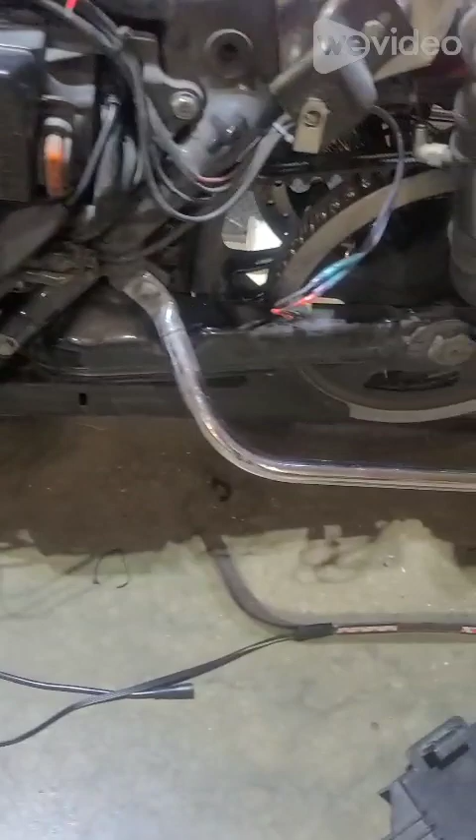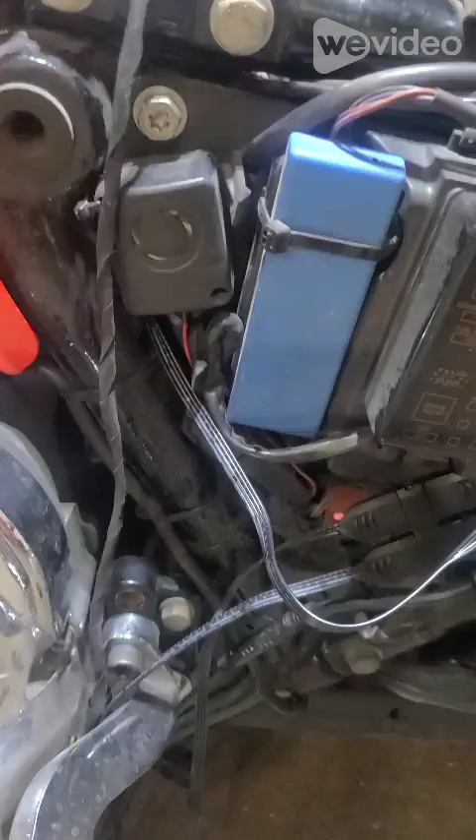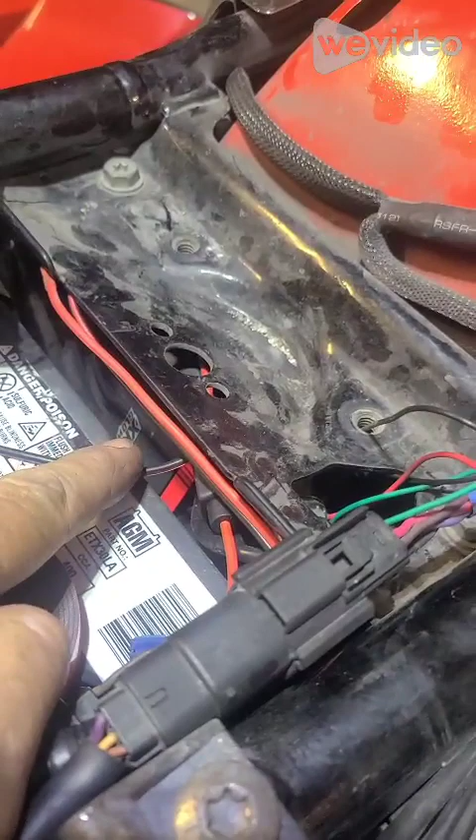These are down here, there's going to be a pod back here in my fender. The strip here is going to run up and come into the connector here that you see. This is the splitter, and it comes from my control, which is put back here underneath the seat.

It's got 3 wires that come out, a black, red, and a yellow. I added wires, so I've got a black, red, and a green, and these are for left, right, and brake signals, so you can turn your lights, whatever.

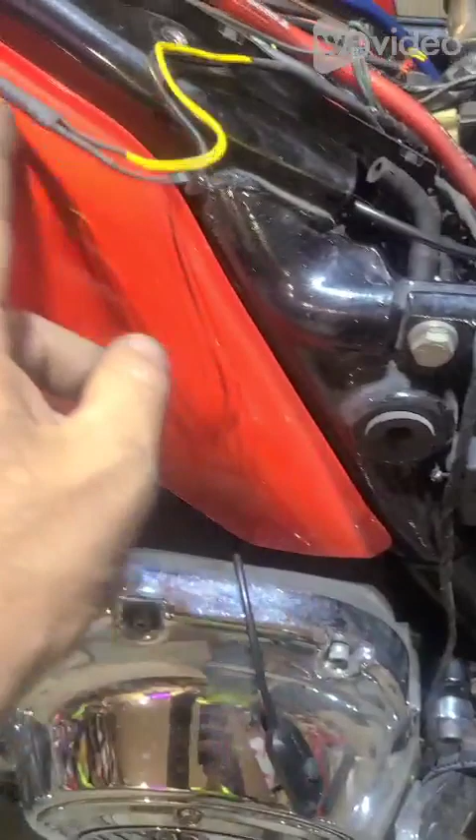Then from this pod here, from the splitter, I go up and come up in here. I'll have a pod in here, just like the other side where it's at already. It is, let's see, where's it at? Right there, you can see it.

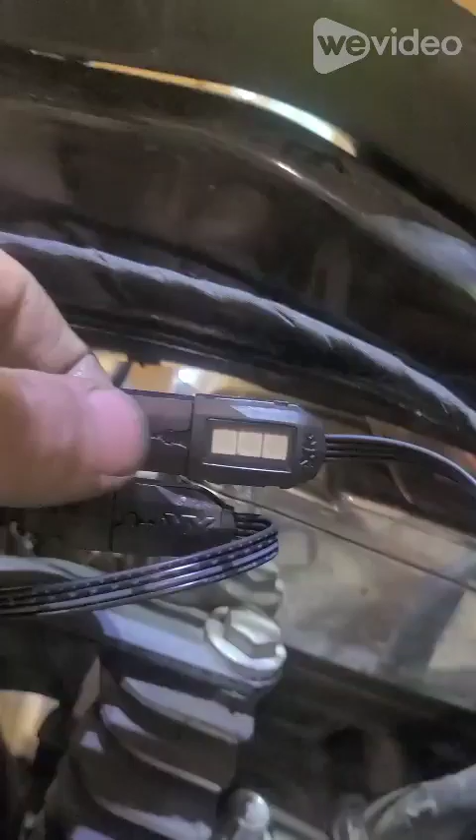It'll be over here, and then it's going to run up, and there's going to be a strip that goes across here, which you can see. I already have a strip and a pod right here by my splitter, and then my splitter is going to come off to my horn right here after I get it put in here.

Sorry, after I get it put in the horn. And then it's going to run off of that from here up into my fender up here, and I'm going to put a pod on the inside of my fender in here on each side. There's separate channels, so there'll be 1 channel per side.

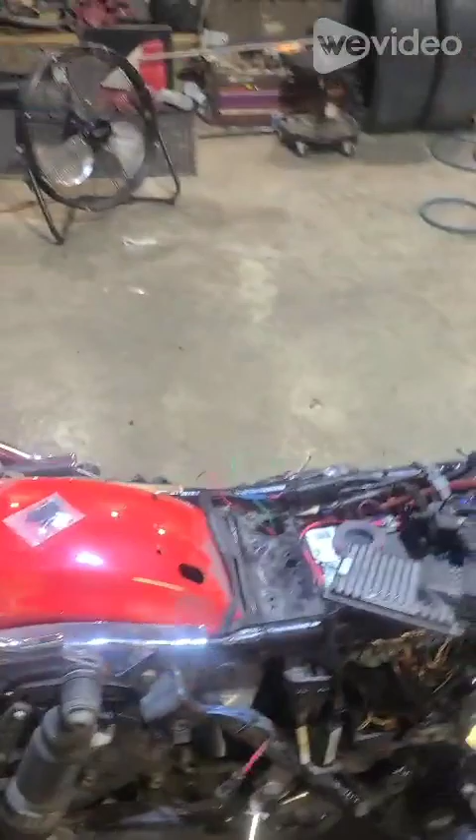And I've already got some of the lights on, let's show this again real quick. This is XKglow. I've got, with this kit, 10 pods, 8 light strips. And you have to pretty much lay it out however you want, because there's no videos out there other than this one that's going now.

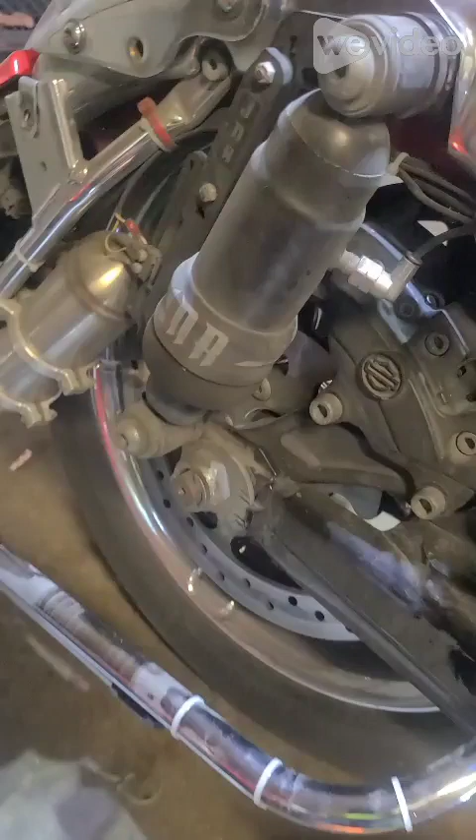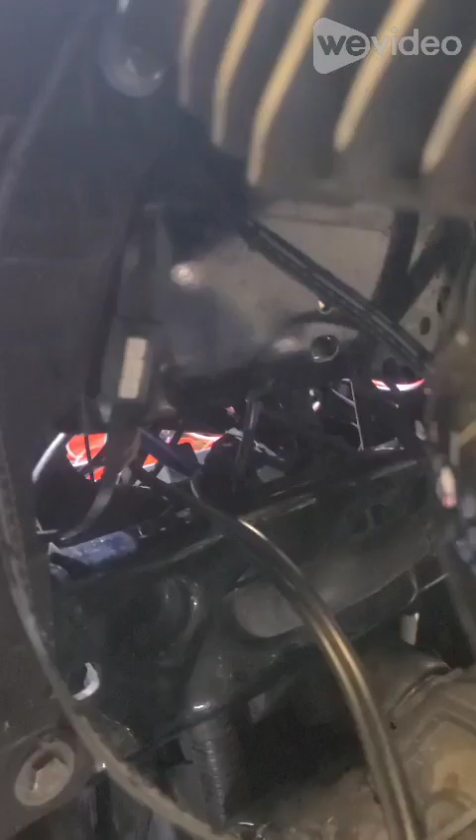But there, I put a pod there. I put a strip here underneath my bag that runs across the bar. Like I said, I put a pod in there, and I am working on putting the pod here. It would be on top of this valve cover, and then the strip's going to cover the rest of the area here.

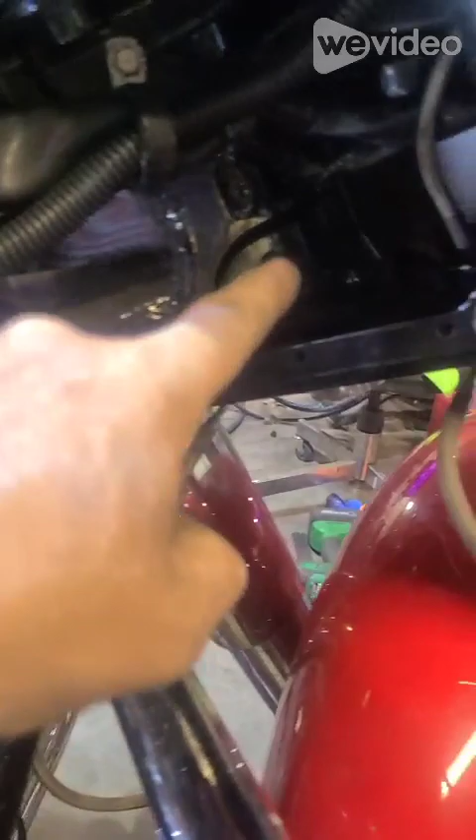Then I'm going to split off of it and go up into my neck and down my brake into the inner fender. So far it doesn't look bad.

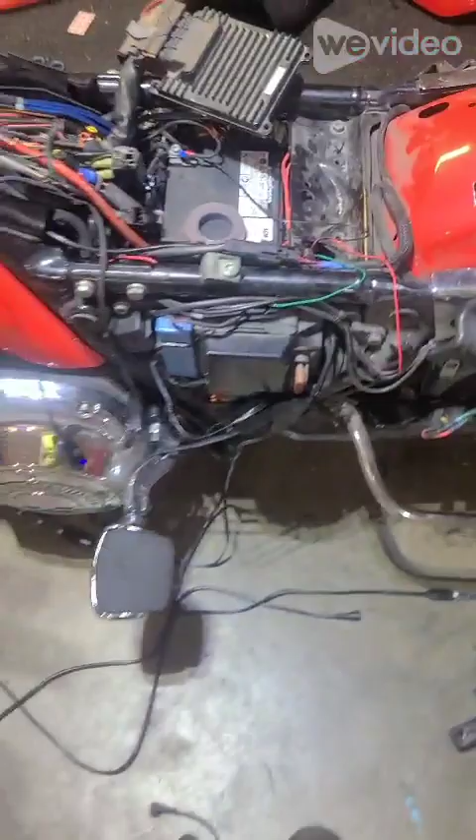You gotta, when you get them, take them out, hook them all up, make sure they work, and if they don't work, you can exchange it. But I've done that with mine. I mean, these are my lights just laying around right now. But as you can see...

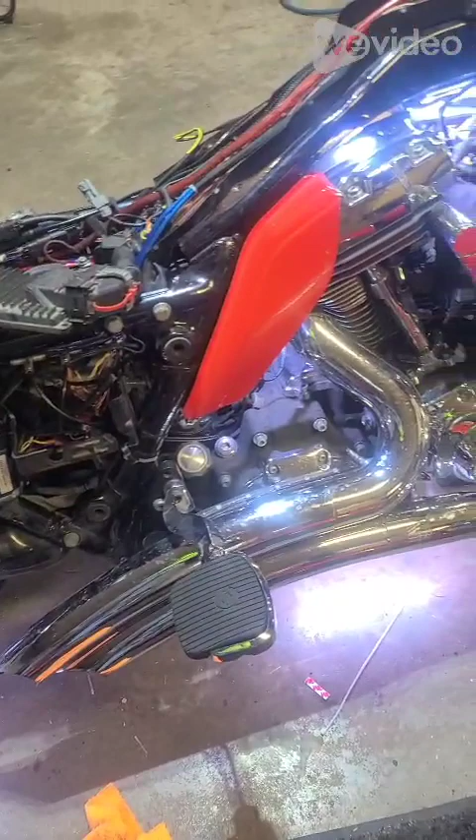Standard turn on is white, and it has all these other mods or things in the app that you can do with colors and the way it rotates and runs down and just different stuff. So I wanted to give you a quick rundown.

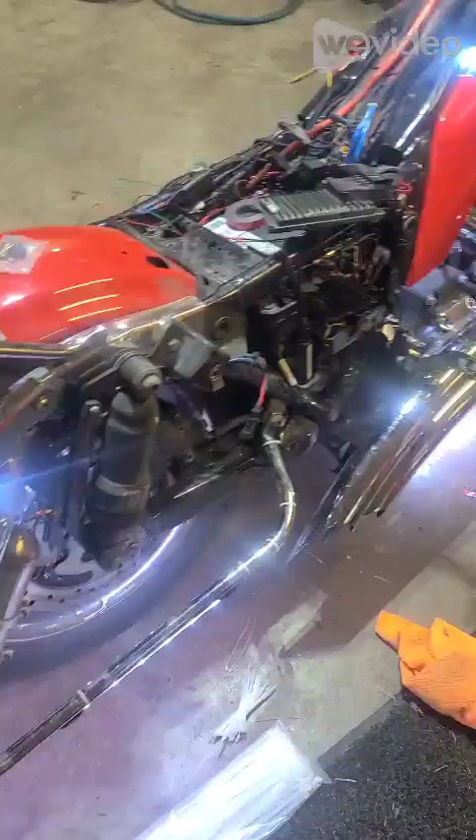You gotta clean all the spots good, 2 or 3 times with alcohol. Make sure they're clean so that the sticky sticks to it. It's got extra stickies, I've got all the extra 3M stickies that I could want, and little ones for the zip tie holders right here.

I got more, I got 8 splitters, Y splitters. I got these zip ties that they supply. That is definitely not enough, you will need to get more.

We've got two RGB splitters, this is a main, and I got two main cords also, which I forgot about and I'm not gonna run. This one I just got hooked up, but we're not gonna run it because there's no need for it right now. There's not enough on my bike to do that. Once I get it done, I'll figure out how to add it to this video, and you can see it when it's completed.

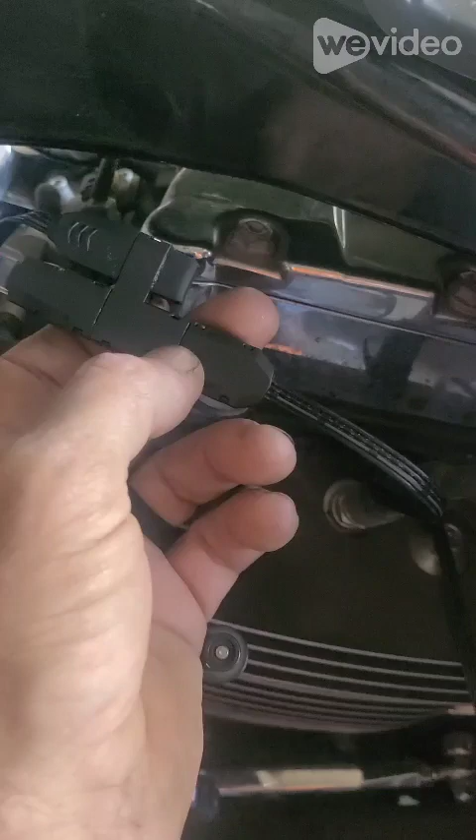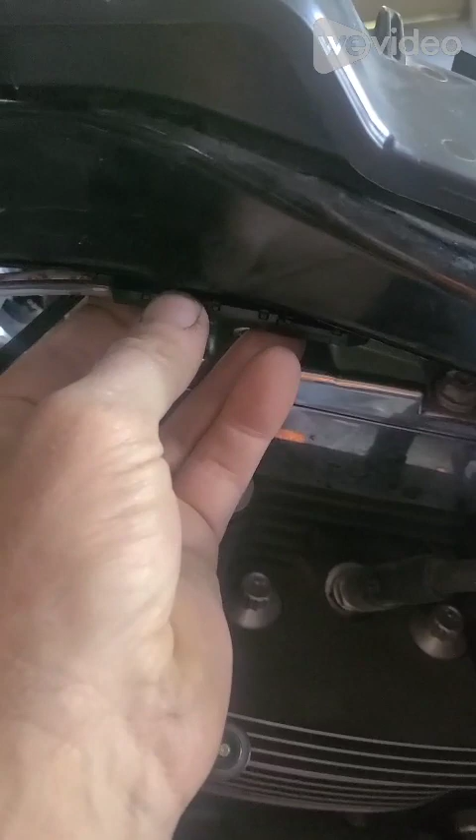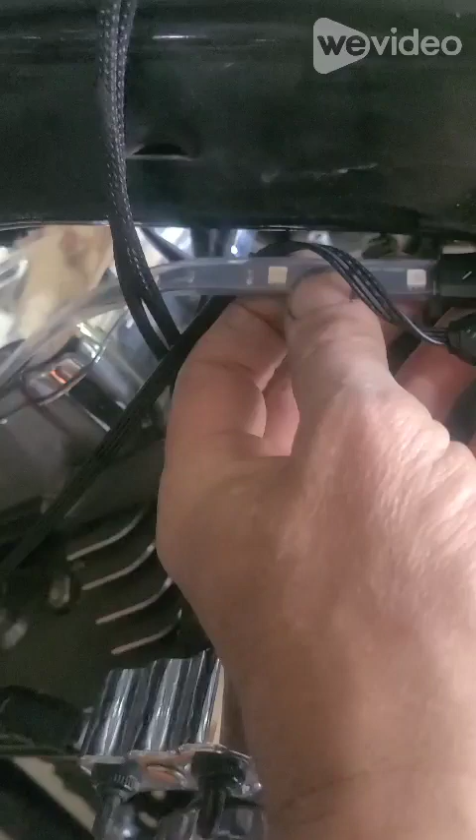Okay, I want to cut in here real quick and show you. While I was running everything, I noticed that these Ys are all one way. I was going to go here on my neck and run them down just like I did the other side. Well, with me doing that, this piece here is running right in with my spark plug wire. On the other side, this piece is on the outside, more or less like this. But if I did it that way, the lights would be pointing up, and you can't do it that way. You only connect one way.

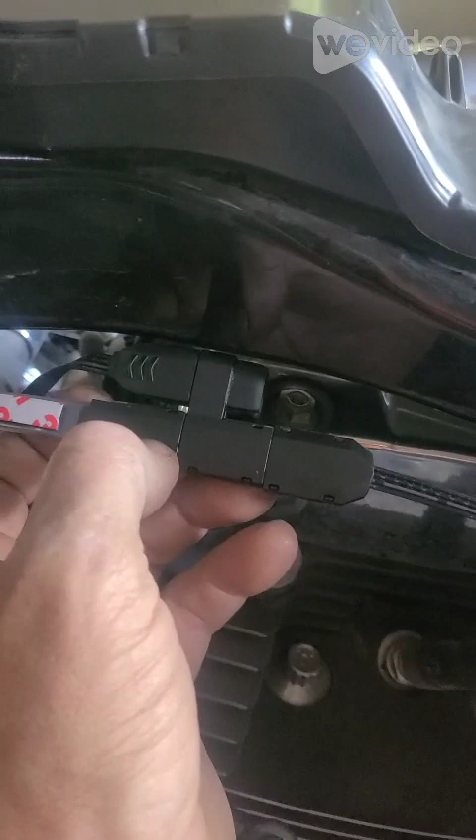I wish they'd make a left and a right, because that would be helpful, but this is what we got. I'm going to continue to finish so that I can get this video done and get it out.

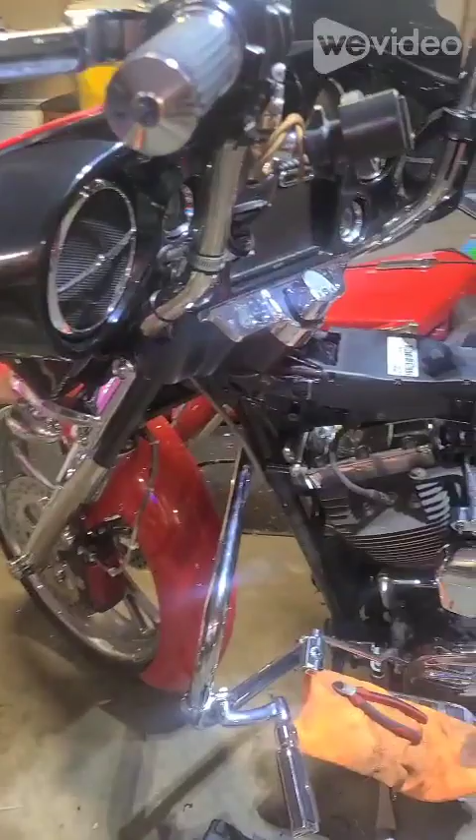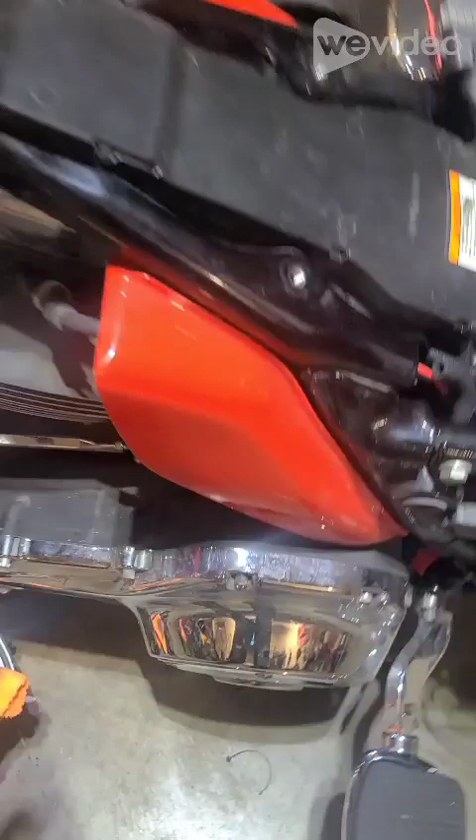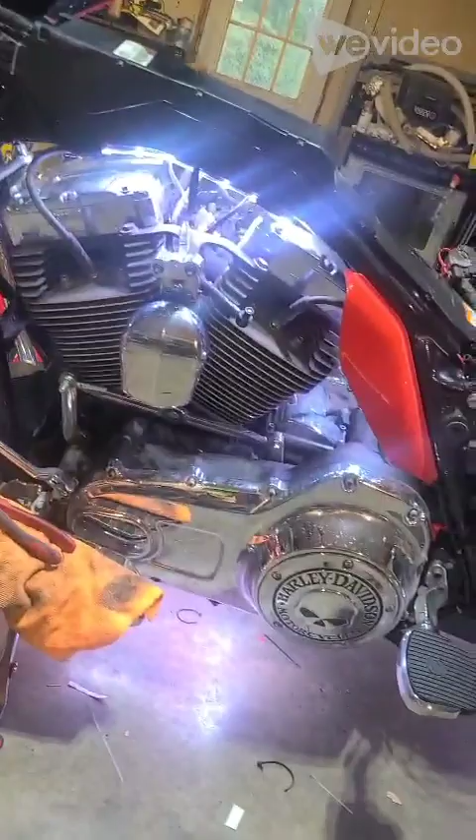Okay, so I want to go over this real quick with everybody and show you I have ran everything that I have. Let me turn them on. My power button is behind my wind plate here, or whatever you want to call it. But I have them ran under the neck, both sides of the neck. I have a set under the bike each side. I've got two pods up here, one on each side.

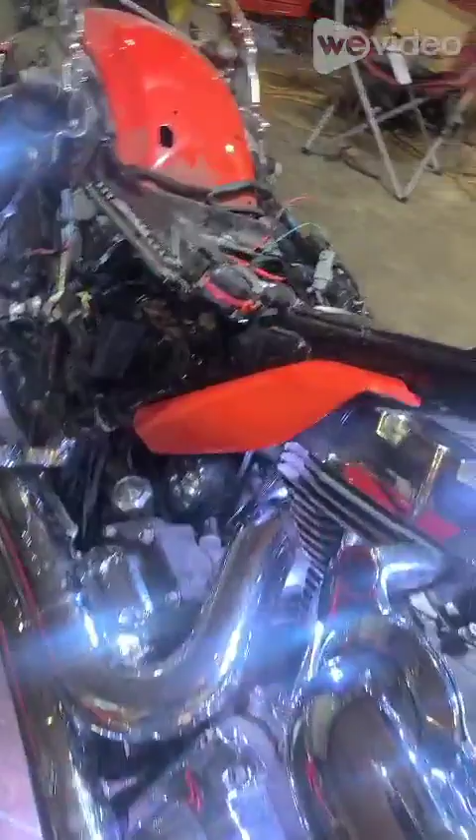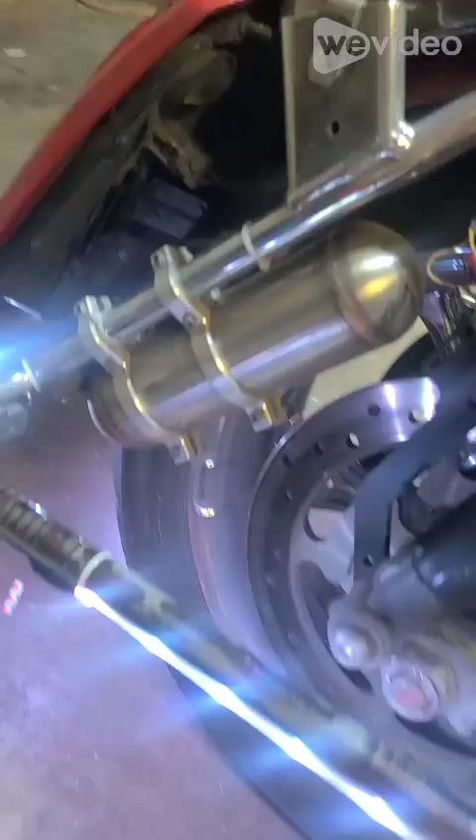I have the sides done. There's strips on each side here on your bag. And then I have the pods in here underneath on my fenders, on the fender. And this is how I had it all laid out.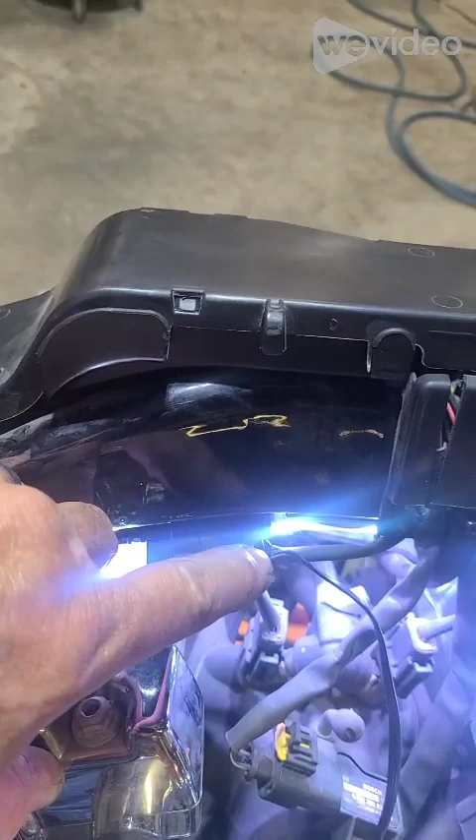Like I said in part of the other video, these little things here, the splitters, the Y splitters, are a little cumbersome in the way they're built. They're built the same way on each side. So this part is hitting in, like I said, my spark plug, but it sticks over here to get the same effect. Then I ran it up my neck, up in there, and come down, chasing it around with my brake cable or brake line.

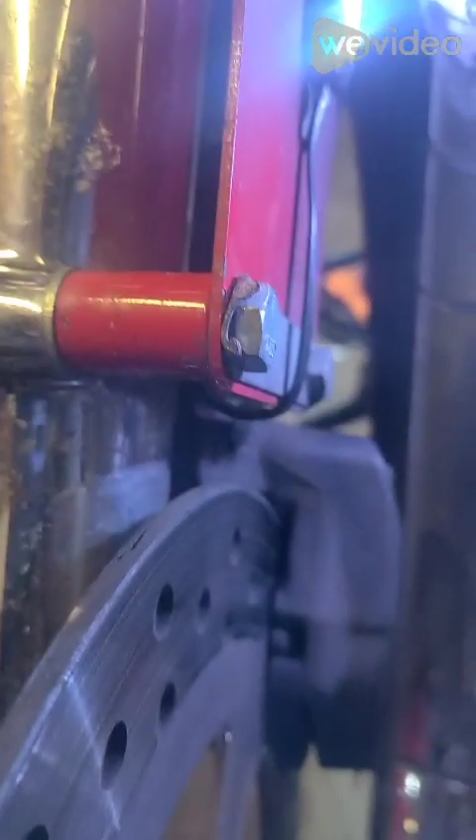And on this one, being as it's a pod, I just went under and came around. I don't know if you can see it, but it came around and stuck it in there. But that's pretty much it.

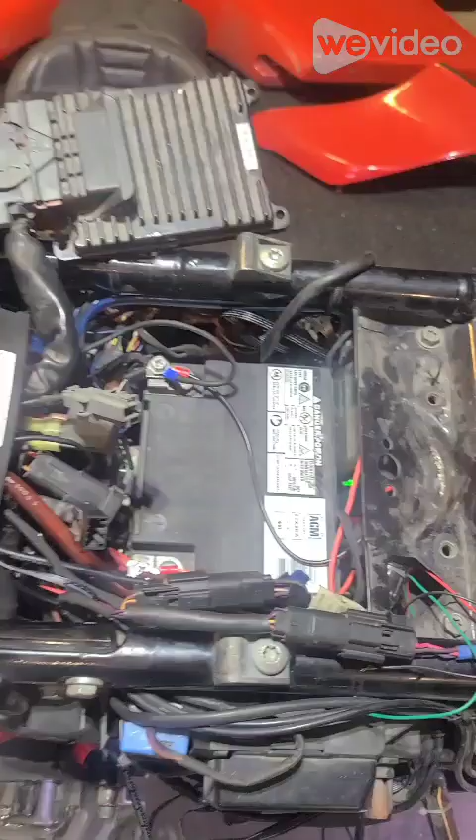Everything's on. I just got to button up, put all the stuff back on it, and then set it up with the app, the XKalpha app, I think is what it's called. But it looks good. I put my controller box in here, you can see the green light behind my garage door opener. I just ran everything normal and made it look good. I try to clean it up so it's not real gaudy, but once I get done, I'll show a finished product and play with the lights a little bit, I think, hopefully. Maybe not, I don't know how this works with the camera, but we'll see.

Well, here it is, all its glory. It's all lit up. I'll go over everything as soon as I show you. I don't think I can run the app while I'm on the phone trying to take a video. I don't have a second camera. But this is what the bike looks like with it all lit up.

It don't look bad, very bright. I gotta say that, it is very bright. Come around inside again, I'll back up here, get a better picture. It looks really good. I'll take a minute here and switch it and put the lights on that I have separate. Alright, got them switched around.

Alright, so I have 4 different channels. As you can see, I have 2 on the front. The blue is on the motor up to the front wheel from the side panel, and then the rear and the lower on this side is yellow. We go around here, and the same goes for this side. It's red on the bottom lower area, and then the green comes motor to the front wheel.

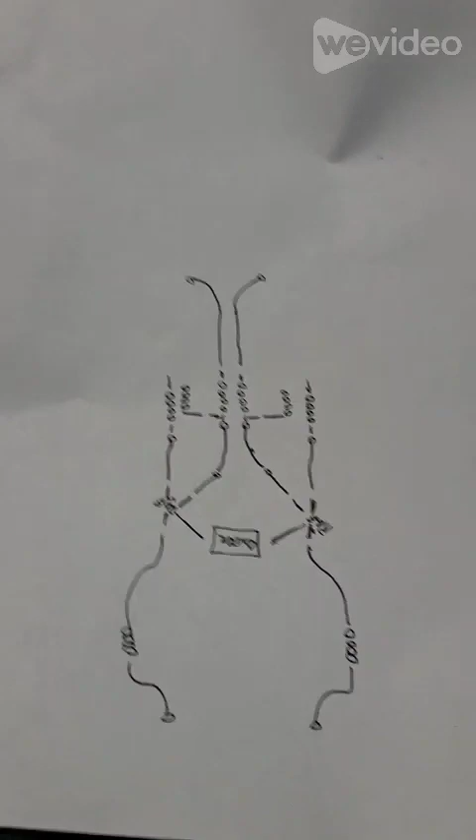I'll go over the other stuff in the paperwork here in just a second and show you what I had to do. Okay, I know it's not a professional drawing, but hey, whatever.

Okay, this is my controller. It's under the seat, and back here runs down to an RGB controller. When I first showed you the first part of the video, I had only one RGB controller, which is the Alpha mod box.

That comes with it, and you get 4 of those. I thought that you were supposed to daisy chain off of it and go under the bike, up in the front end of the tank here. This is my horn, that's my air breather, and then on up here is under the tank, and these are the 2 pods on my front wheel.

What it has to be, when I show you the other paperwork here in just a second, I had to use both RGB controllers on this side and both on this side. So all 4 are being used underneath my side panels, and that's where I split for the rear and the lower, these 2 here, and then I put the other one on the rest that run up to the front, same on both sides. So let me get this paperwork out here.

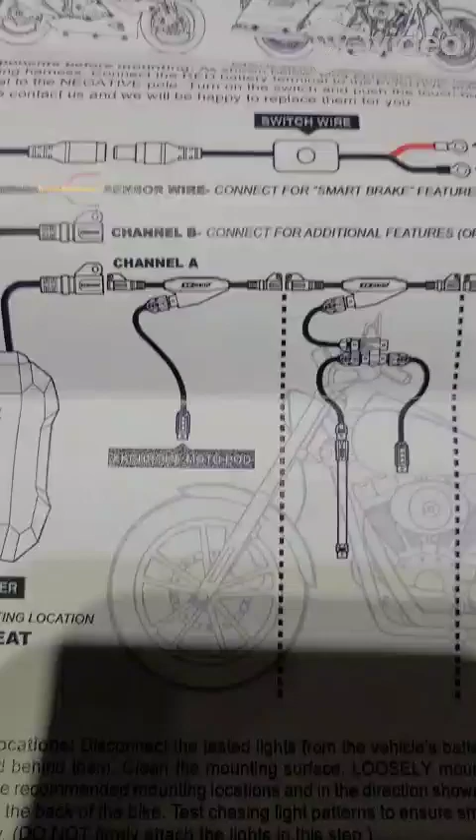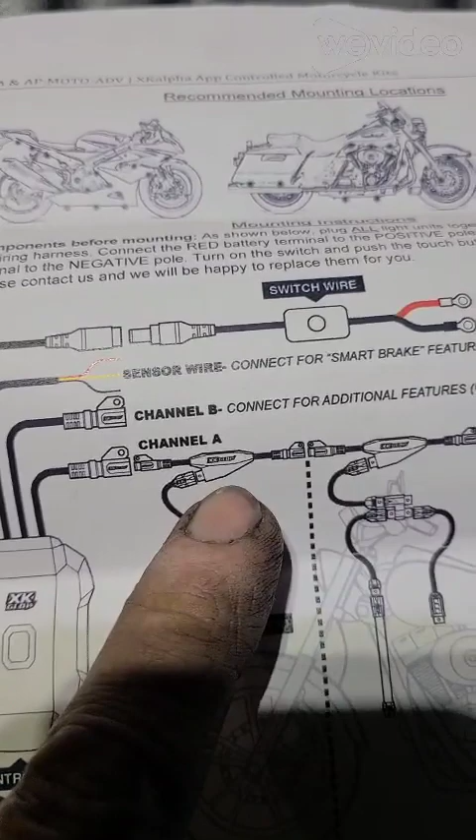So you've got your controller, and these are how you get your 4 different zones, as I would call them. So you've got zone 1, 2, 3, and 4 here, okay? And you can run lights off of them like I did.

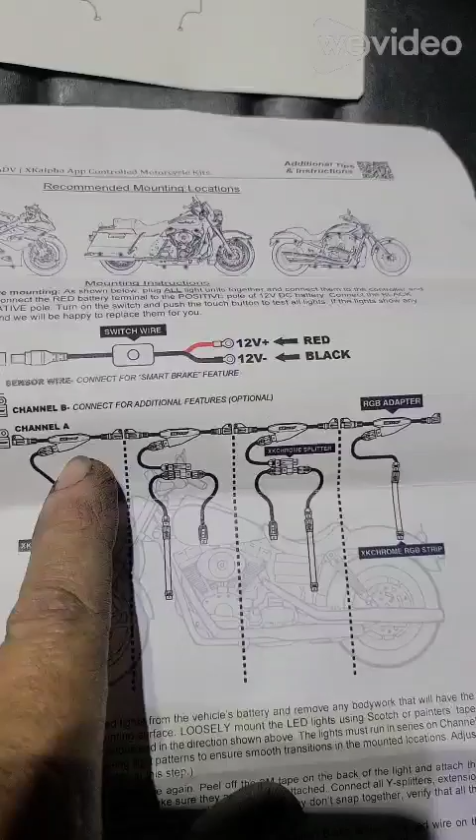But if you want to separate each part of your light setup, you have to have these little box controllers. They only send 4 in the pack. I am using both channels, A and B, on my bike, and this is how it's all set up.

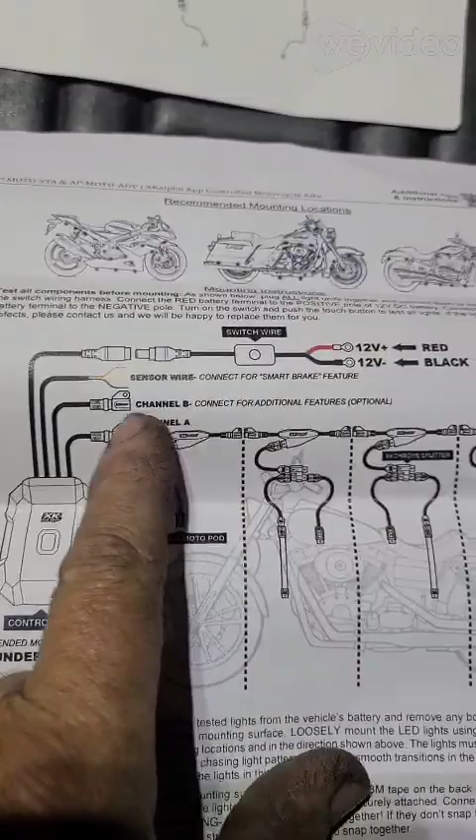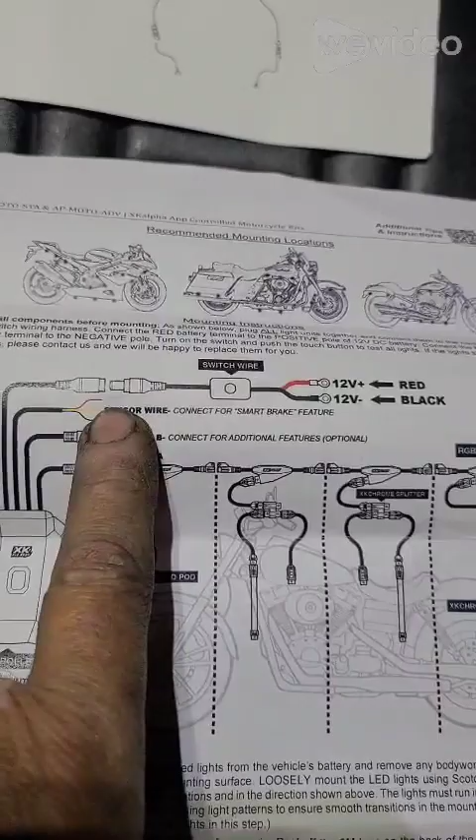I run the red wire for my brake light, and I have the yellow and the black. They're still open. I don't have them connected yet, or I might later, I don't know. And then you got your power wire with your power button, which is underneath my side plate.

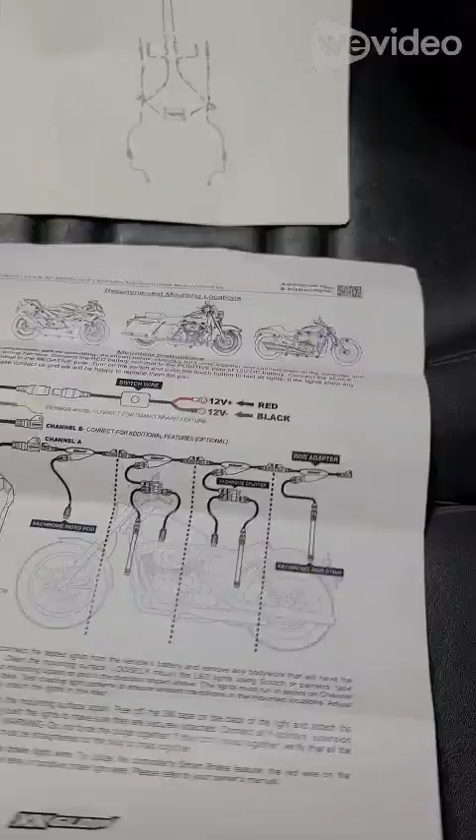There's not real good directions on the install. Like I said, when I first started, you have to lay it out how you want it, because that's the only way that you're going to do it right and do it the way you want.

So every time, these little nodes they show you here on B side or A side, you got 1, 2, 3, 4. Well, that's what it's showing you, what I just showed you on the other page. Each one of these is one of those control boxes. It does not show up like this if you don't have a control box there. So you have to remember that and how you're going to lay it out.

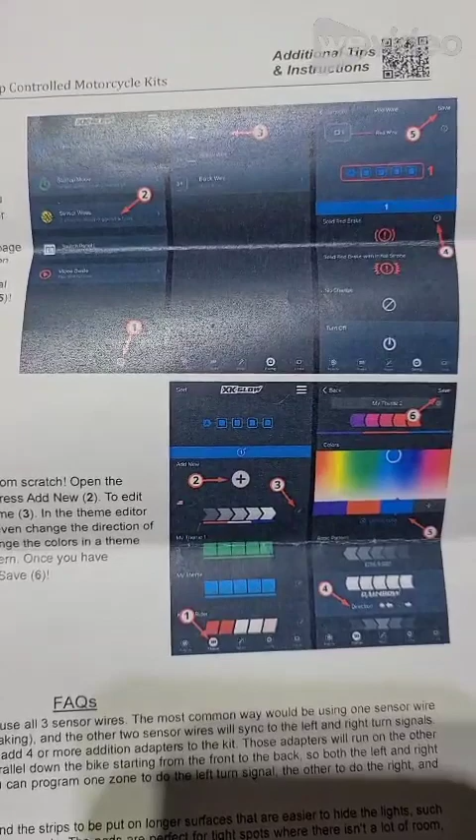Because I'm telling you, these lights are fascinating. They do dances and everything else in these customized themes, these customized themes that they say here. You can customize the existing themes. They've got light chases. This is like the Knight Rider chaser here, where my finger is, obviously. But yeah, it's pretty cool. It's fun to play with.

I can't show you the app, like I said, because I don't have a second camera to be able to do that with. But the bike is done.